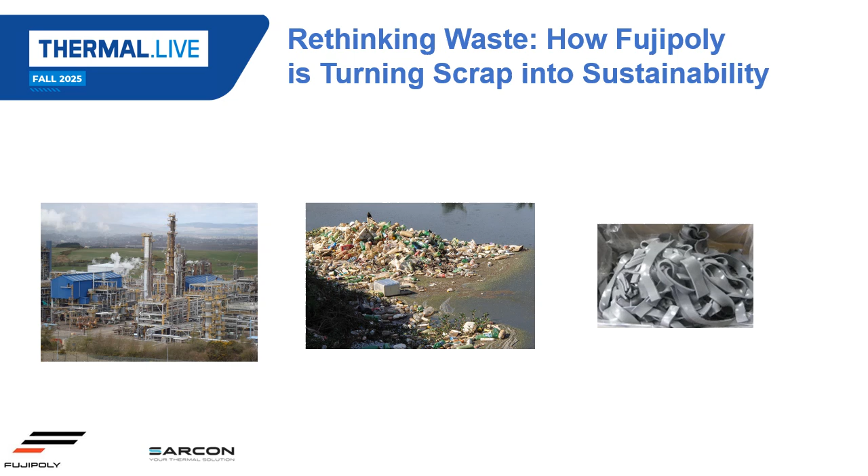So before we jump right into the presentation, I'd like to give everyone a little bit of background on Fujipoly, especially for those of you who are not familiar with us. Fujipoly was established in 1978, specializing in the secondary process of silicone. So what that means is that we take silicone in its many forms and enhance its properties to achieve characteristics that you may not normally find in silicone. So things including thermal conductivity and electrical conductivity are very common. We're best known for our Sarcon thermal gap filler products, but we also excel in molding and extrusion, producing high quality silicone products. We have extensive experience offering customized solutions tailored to specific application needs.

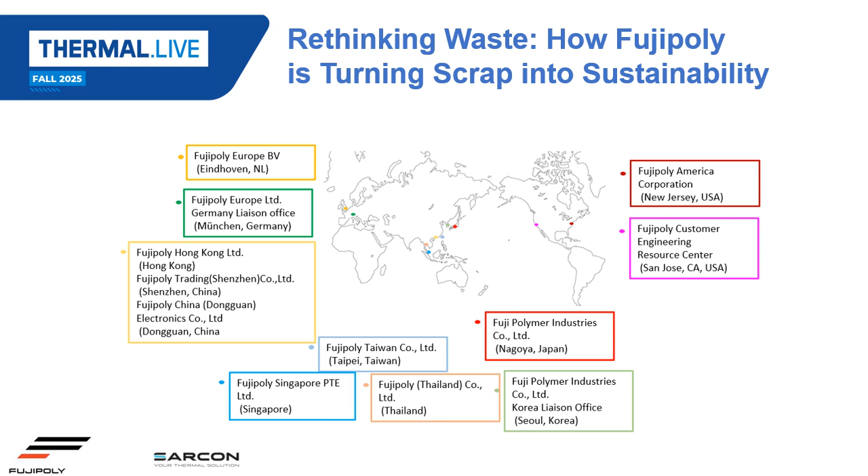Our headquarters and technical center are located in Nagoya, Japan, where much of the R&D and material development takes place. Our Fujipoly Japan factory is situated in Toyota City. Since our establishment, we've expanded significantly, establishing a substantial global footprint, both in sales and in manufacturing. What sets us apart is our borderless strategy. We support customers wherever they are. For example, if you're designing a product in the Bay Area but need samples in Taiwan, we can coordinate activity and provide support throughout the entire process, from the initial inquiry to manufacturing and product sustainment. We also have manufacturing facilities in the US, Thailand, China. We've recently opened up a new facility in the Netherlands, and we have manufacturing facilities in Singapore.

Our efforts to improve sustainability are not something we just started. In fact, this has been a focus for several years. What we learned is that even small changes, whether in the way we manage our facilities, design our products, or support our teams, can add up to making a big, meaningful impact. It's about taking consistent steps forward, knowing that each improvement helps us move towards a more sustainable future.

Making efforts to reduce our impact on the environment often begins by simply paying attention to our own activities and looking for ways to improve. Sometimes, though, it helps to bring in someone from the outside who can spot opportunities we might overlook. In the case of sustainability, partnering with third-party experts provides a fresh perspective along with the experience needed to guide meaningful improvement. For example, our facility in New Jersey has been undergoing auditing and identifying ways to improve our impact.

Something we quickly identified as a way of improving sustainability is simply reducing paper waste, or eliminating it if we can. Anyone that's worked in an office environment knows that paperwork is part of daily life and administration of any department. All Fujipoly facilities have been implementing a program to digitize documents when we can. This helps significantly reduce the amount of paper waste.

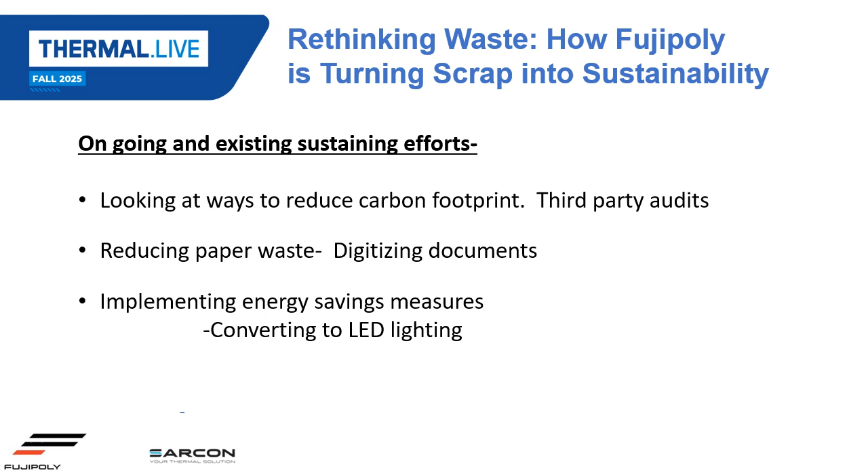Energy saving measures, of course, have a tremendous impact. Sometimes something as simple as replacing high energy consuming lighting with LED lighting has significantly reduced our energy consumption. We have implemented this at our facility in New Jersey and one of our largest manufacturing sites in China. Converting to alternative forms of energy production, such as solar power, can significantly reduce the environmental impact of our manufacturing operations. At Fujipoly America, we're putting this into practice. Our New Jersey facility will be relocating to a state-of-the-art site in the coming year, and part of that move includes the installation of solar panels to support clean energy use.

As a material manufacturer, where we have the greatest impact on the environment is through our direct manufacturing activities. The most significant factor here is scrap generation. While we always strive to keep scrap to a minimum, some amount is unavoidable. Scrap can result from non-conforming material that does not pass inspection, from the inherent byproduct of the manufacturing process, and from the conversion of sheet stock material to die-cut parts.

This last step is an essential part of delivering finished products, but it also produces unavoidable scrap that carries a significant environmental impact. It's important to note that scrap doesn't only come from products themselves. The complementary materials that go along with our products, such as liners, which are an essential part of thermal gap fillers, also contribute to our overall scrap volume.

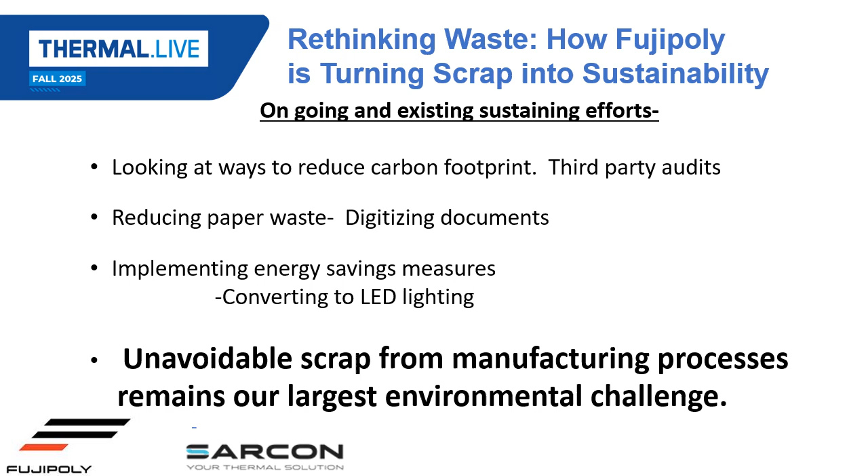For us, this often means PET waste, since nearly every thermal gap filler we manufacture includes a PET liner. While these liners are critical for handling, processing, and protecting the material, they do add to the environmental footprint we're working to reduce. With that, I'd like to introduce Mr. Yuji Yoshida, our R&D section manager at the Fujipoly Technical Center.

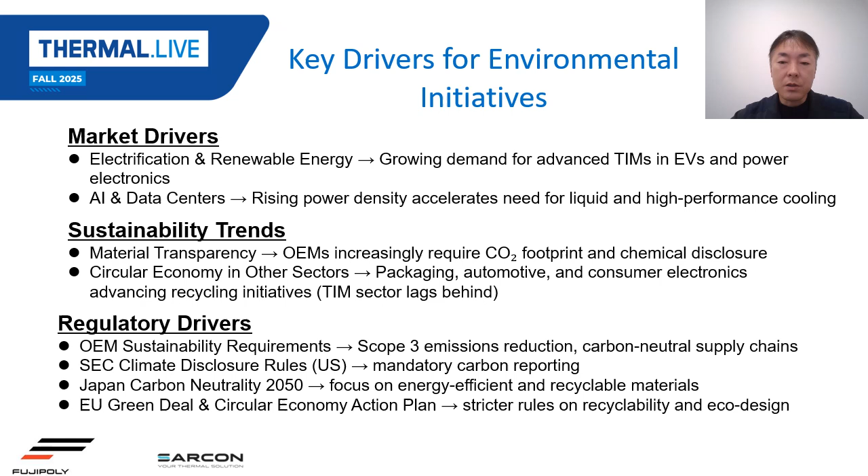In the US, the SEC now requires mandatory climate reporting, and OEMs are pushing for Scope 3 emissions reduction and carbon neutral supply chains. Similar initiatives are underway in Japan and the EU. Briefly speaking, the TIM industry, currently behind in circular economy practices, may soon face strong pressure to accelerate sustainable innovation.

Let's look at the sustainability issues related to TIM products. While TIMs are often labeled as sustainable, because they contribute to environmentally friendly products, it is extremely difficult to make TIM itself sustainable. Most TIMs are made from thermosetting materials like silicone, which makes them difficult to recycle. Recycled materials generally suffer from property degradation and high costs, which is a major challenge for high-performance products such as TIMs.

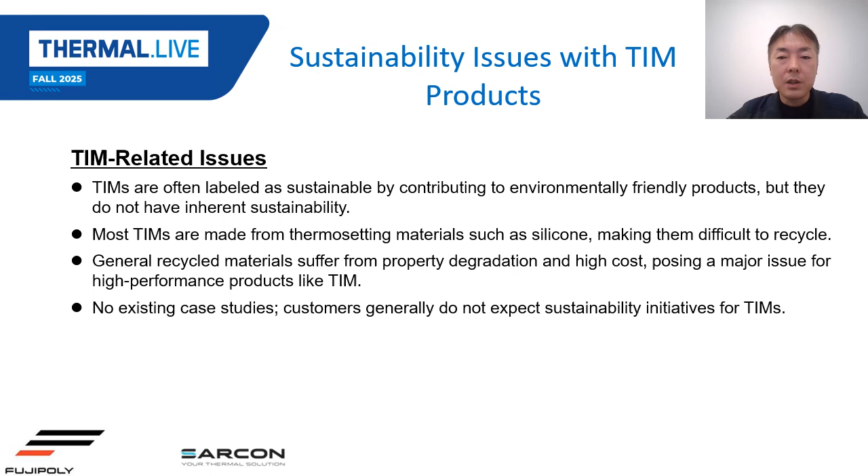Furthermore, there are no existing case studies, and customers typically do not expect sustainability initiatives for TIMs. Finally, these challenges mean that TIM products are still far from being truly sustainable, despite the growing market demand and regulatory pressures.

Of course, there are challenges in addressing sustainability. Our main product, pad-type TIM, has both pros and cons. It helps minimize waste for customers. But manufacturing generates significant scrap, such as molding flash and material loss when cutting to shape. In some cases, over 40% of the material can become waste.

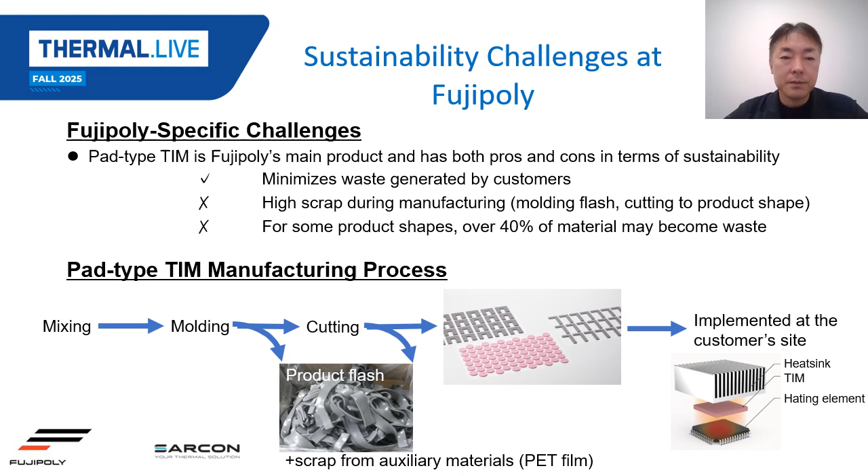In order to come up with a method to recycle our silicone products, we need to consider three main areas: chemical, mechanical, and thermal. Chemical treatment can depolymerize silicone, but typically requires highly alkaline solutions, creating environmental concerns and leaving inorganic fillers as residue. Mechanical treatment is impractical because the gel-like TIMs can't be crushed like conventional rubber. It makes handling and property control difficult.

Thermal treatment combusts the material in the presence of oxygen, producing silica that can damage equipment. However, under low oxygen conditions, this issue can be suppressed, though the resulting low molecular weight siloxanes still need to be recovered. Taking these challenges into account, we selected thermal treatment as the most promising method because it enables the separation of silicone and the potential recovery of inorganic fillers.

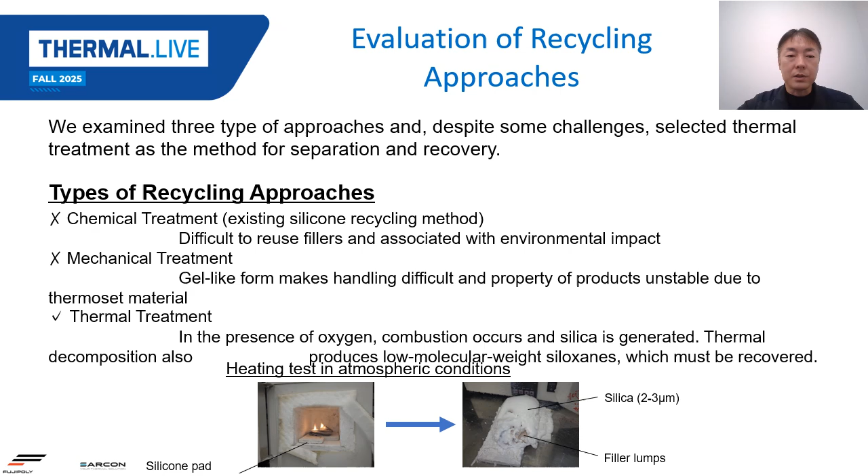Here you can see an overview of Fujipoly's raw material recovering technology. As shown in the diagram, the process starts with TIM flash, which goes through thermal treatment. After separation, you can see both the recovered fillers and the silicone byproducts. After thermal treatment, the fillers are hardened and clumped together, so we crush them back down. This process restores them to fine particles, similar to the original fillers.

There are three key points to this technology. Point 1: thermal conditions. By controlling oxygen concentration and heating rate, we prevent silicone combustion and maintain the surface condition of the inorganic fillers. Point 2: gas recovery mechanism. Through a dedicated recovery system and temperature control of the piping, we can effectively collect low molecular weight siloxanes while preventing clogging from D3, which solidifies at room temperature.

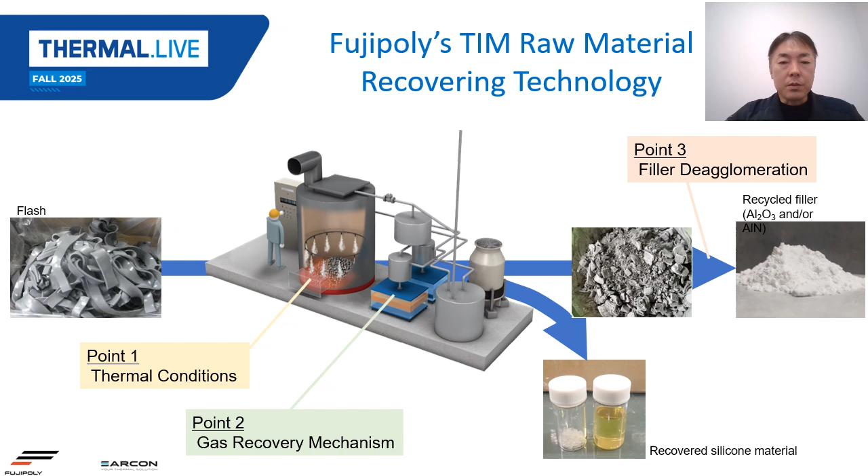Recycling efforts can also be focused on the enabling products, like the liners used in the thermal gap filler products. Liners are critical in the manufacturing, packaging, and use of silicone thermal gap filler.

In collaboration with a partner company, we've established a process to recover and reuse PET film scrap that's generated during molding and cutting. Thanks to this initiative, we've been able to cut down scrap by more than 1 ton every month. That said, PET film recycling isn't without its challenges.

The films can be contaminated with silicone residues. Release agents are often applied as a surface coating, and there are multiple types of PET, which makes sorting and recovery tricky. To address these challenges, our process is specifically designed to tackle these issues and recover PET film efficiently for reuse.

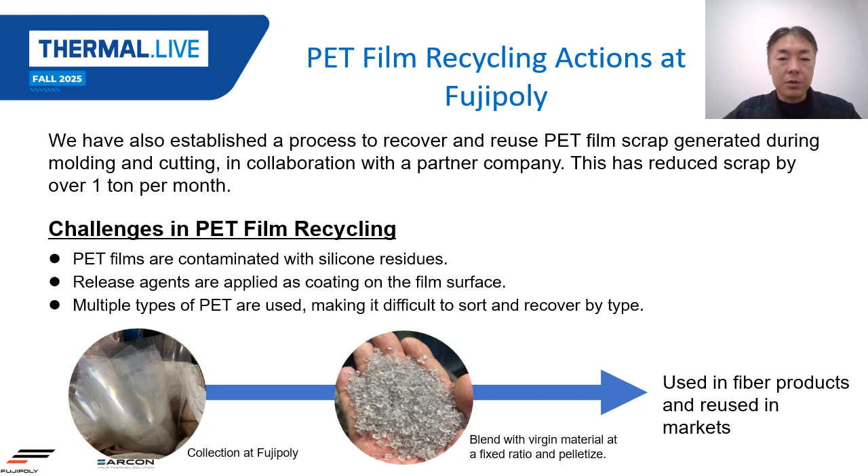I'd like to highlight Fujipoly's proposed environmentally friendly manufacturing process. In this process, waste generated during production, including TIM and PET film, is collected. The PET film is sent externally for reuse, while TIM is separated and recovered into its components, inorganic fillers and silicone materials. The recovered silicone is reused externally as silicone oil, and the inorganic filler is recycled back as a raw material for TIM. Each step of this process relies on key technologies.

First, we design product formulations that take advantage of recycled filler. Second, we have a collection method that ensures the quality of waste, which requires sorting TIM by product type. Third, we use our proprietary technology to separate and recover raw material. Together, these key technologies make the process work efficiently and sustainably.

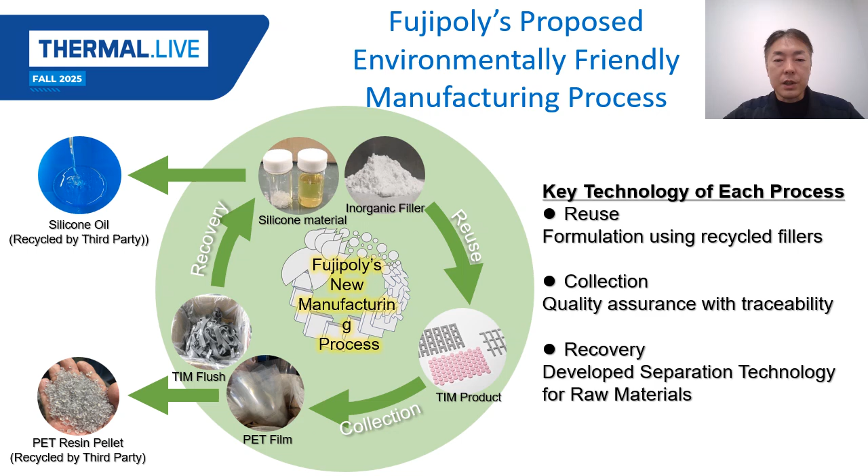A common concern is how the use of recycled material might impact the performance and reliability of silicone products. I'd like to talk about the performance and the features of our recycled filler, which we obtained using Fujipoly's proprietary technology. Compared to virgin materials, the recycled filler has comparable thermal conductivity. It doesn't cause curing inhibition that often occurs with fillers in platinum-catalyzed silicone polymers. And it has good flow and packing properties.

The particle size distribution remains intact, which means it can be used directly as a raw material for original TIM products. In addition, its cost is comparable to or lower than typical thermally conductive fillers, like alumina. This allows us to achieve high environmental performance, including lower CO2 emission, while solving the common challenges of recycled materials in terms of both performance and cost.

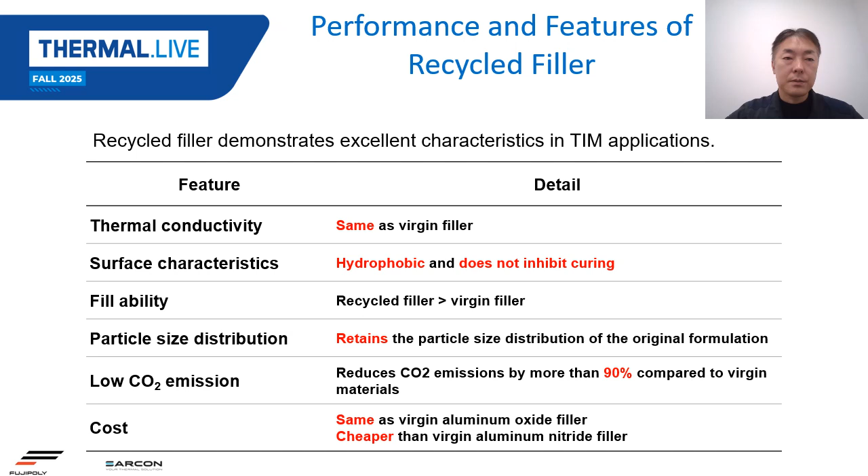In order to ensure our customers' requirements are still met, we evaluated TIM samples in which part of the filler was replaced with recycled filler. All the fillers used were aluminum oxide. The thermal conductivity remained the same, regardless of the amount of recycled filler included. Regarding hardness, TIMs with up to 50% replacement of filler show comparable hardness to the original material. However, with 100% replacement, hardness increases significantly.

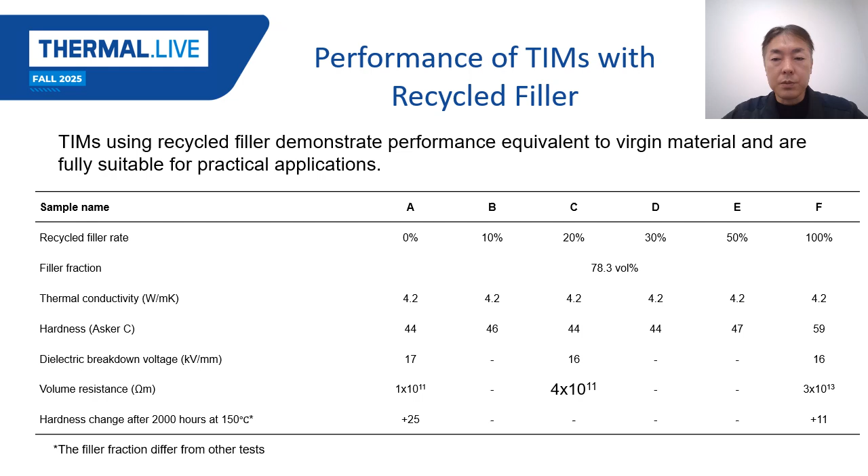Let's look at the customer benefits of TIMs with recycled filler. Fujipoly's recycling process and the use of recycled filler allow customers to enjoy these products without compromising environmental performance, cost, or quality. First, they can enhance their life cycle assessment performance by using products with low CO2 emissions while maintaining cost and performance. Customers can improve their life cycle assessment scores.

Second, the recycling process helps reduce the cost of high thermal conductivity products, allowing customers to obtain high-performance TIMs at lower prices. Finally, because these products are classified as post-industrial recycled materials, they support customers in meeting environmental regulations and achieving sustainability targets.

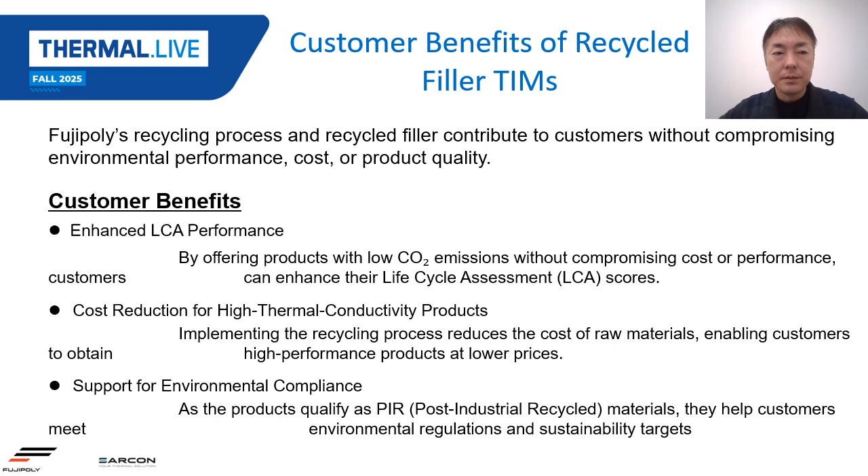We have completed the feasibility studies and established the key technologies. In 2026, we plan to introduce mass production equipment and launch first closed-loop products. From 2027 onward, we aim to gradually expand the range of applications for these products. Looking further ahead, we are working to establish the technologies and systems needed to collect and process various products, both from our customers and from the market. Also, we are conducting research on technologies to recycle aluminum hydroxide, which is widely used in EVs and other applications.

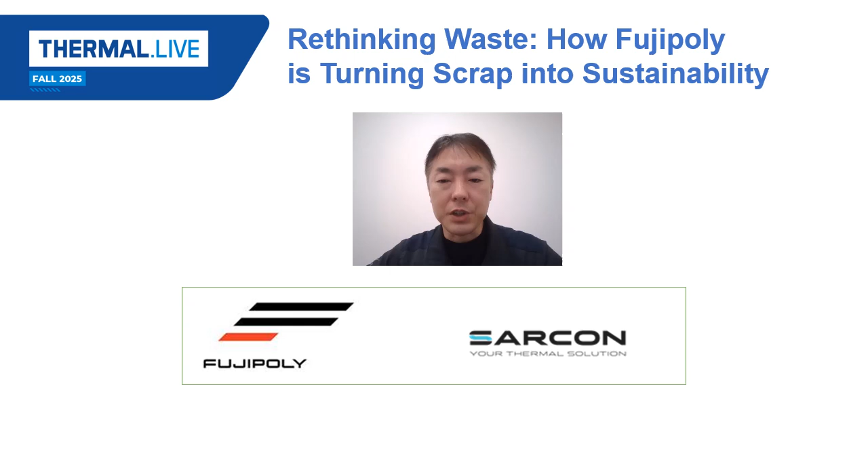We are all investing in creating a cleaner environment. Improving our own activities while also building a supply chain that shares these same values is key to making real progress.